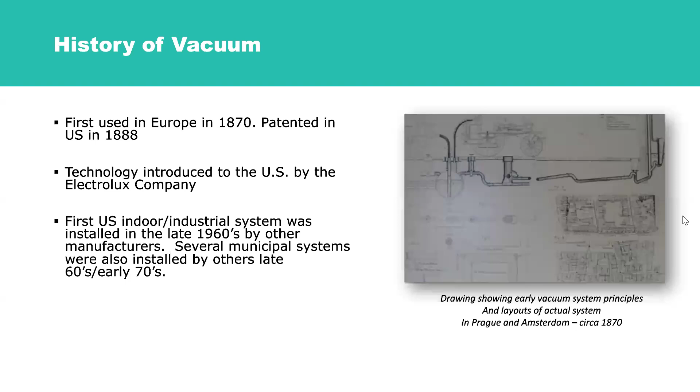As far as our systems globally, we have roughly 450 systems in North America, and another 631 plus in Europe, Australia, Africa. This is just the systems, and connection-wise we're talking hundreds of thousands of connections.

So we're looking at the three major components: we have the valve pit, the vacuum main, and the vacuum station. We'll look at these a little closer.

So the way the system works is the vacuum pumps create a vacuum on the collection tank, and you have the vacuum mains that run out to the pit itself. So that's where your vacuum source is coming from.

The gravity line from the dwelling goes into the pit. As the lower sump fills up, there's a sensor tube in there that's nothing but a chamber of air, and that chamber of air gets compressed. As the sump level rises, it compresses the chamber, compresses the air, and shifts a controller on top of the valve, which we'll look at a little bit later. When that valve shifts, it applies the vacuum from the front of the valve and allows the valve to open, thus letting the contents be evacuated.

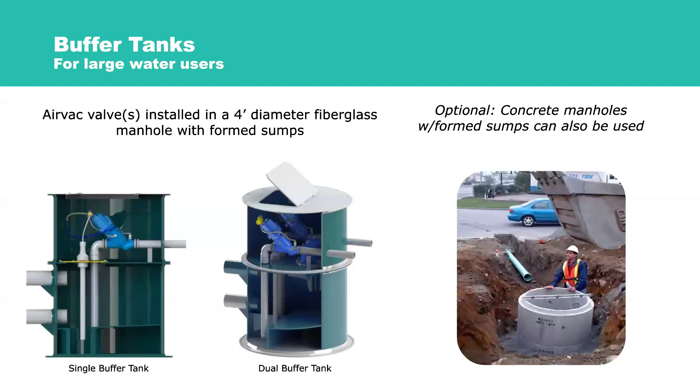As that pressure builds, it'll shift that valve, and it's simply a three-way valve, allowing the vacuum on the front of the valve to shift that valve and apply vacuum to the valve itself, which will pull that piston up.

It has a simple turn setting, a little lever setting that allows you to adjust how much air comes in behind. Once that sump is emptied, it empties roughly 10 gallons of fluid, which takes about 3 or 4 seconds. We'll follow that with anywhere between 5 and 10 or 11 seconds of atmospheric air, and that's what's pushing and propelling that sewage towards the vacuum station.

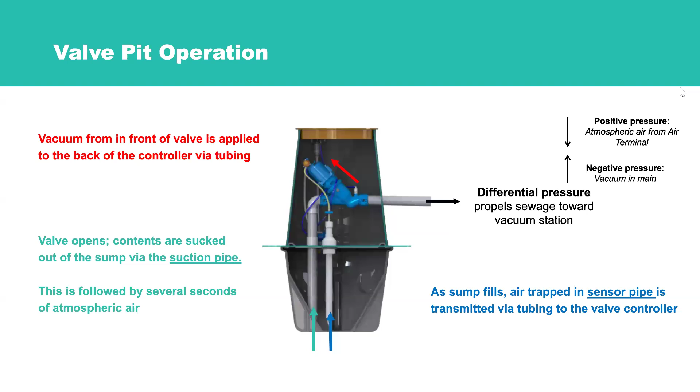So with the valve, it's very simple. You've got the controller up at the top, what I call the brains of the operation. You have the valve operator and the Y body, and this is all glass-filled polypropylene, which is chemical and corrosion resistant.

The operator in that controller can be removed with a simple slip key, like in the next slide, but the valve itself just screws in and screws out. It's a threaded Y body, so that Y body would stay in the pit. If you had to remove the valve for any reason, you would take off 3 lines and then simply screw the valve out and screw a new one back in.

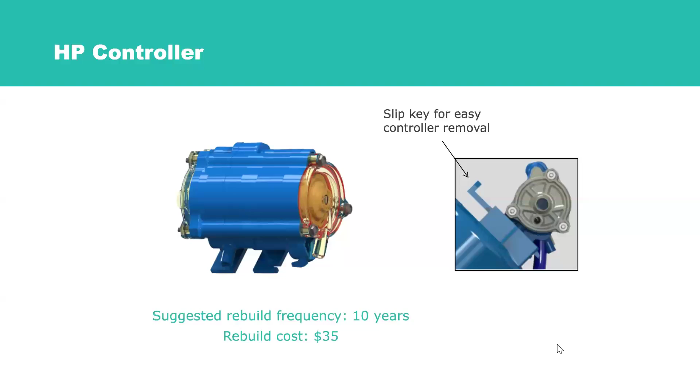Here's a closer look at the controller itself. We call it an HP controller, the newest generation of controllers. If you look to the right in that clear area, that's where the pressure diaphragm is. When that compressed air is coming up, it's pressing on that right-hand side and simply shifting it from that area. And again, there's just a slip key for easy removal.

When you're looking at how we put the pits in, how many houses can use a pit, generally speaking, one pit is servicing between 2 and 4 houses. The real controlling factor is how far the houses are from each other, because we have to accept the gravity line. If the gravity line is too deep, we would probably put another pit. But a lot of times houses are close enough where we can gather at least 2, if not 4, gravity lines coming in.

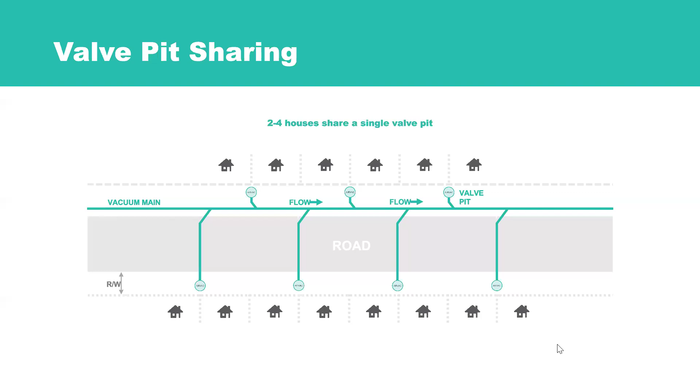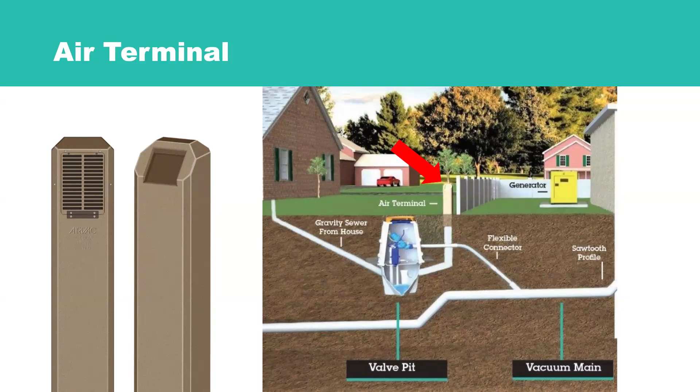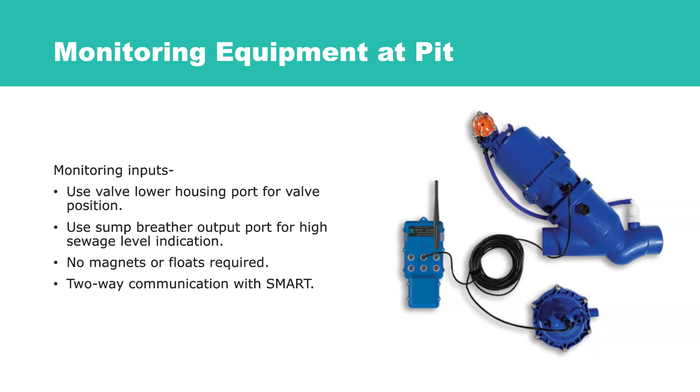So we can either measure and monitor your valve opening, closing, your time of open. We can also monitor your sump levels. And then we can use that information to give you a lot of different warnings or help with proactiveness and maintenance and operation of the system.

This is just a little more information on the monitoring. We are using LoRa, and it is real time. There's the opportunity for bidirectional communication with LoRa.

When we collect the data, we're able to look at it and do modulation with our vacuum pumps. We're able to open and close valves to reduce the chances of waterlogging, or to clear the lines if you know you have a large user coming on. So there's a lot of proactive measures with the monitoring, not just being reactive.

The monitoring is cloud-based. It helps with troubleshooting and helps make it much more of a proactive system. If you're running modulation of the pumps with SMART, we're able to be proactive in opening and closing valves placed strategically along through the field.

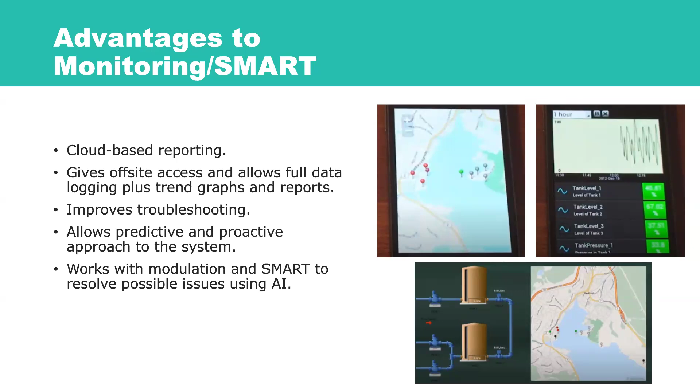A little bit more on smart. Simply, smart is when you have a vacuum system - what we're looking at is we want a nice vacuum from the collection tank all the way to the end of the line. The way that you lose vacuum is if you have what we call a waterlogged condition. So if you can imagine a plug of water being like a wall or a door, you're going to have vacuum up to that point, and you're not going to have much, if any, vacuum beyond that point.

The way we move the fluid is with the introduction of atmospheric air. So smart introduces that atmospheric air based on different conditions, whether it's a timed condition where we tell it when we want it to open at 7 a.m. to clear the line before school opens, or if it's looking at vacuum levels and it sees - say we have a set point of 10 inches of mercury, and once it hits that, we want this valve to cycle, just as a proactive measure so it doesn't waterlog. So there's a lot of different applications we can use smart with that help the system with its efficiencies.

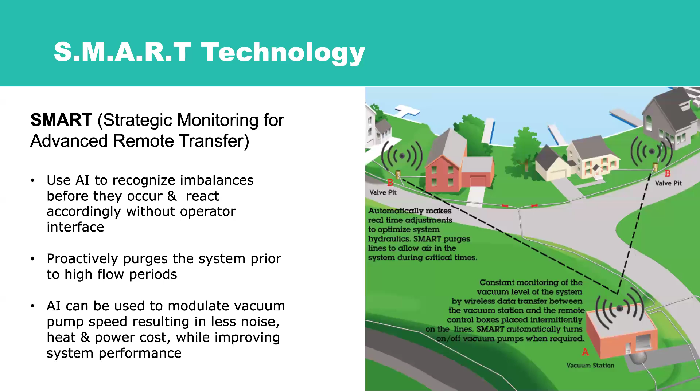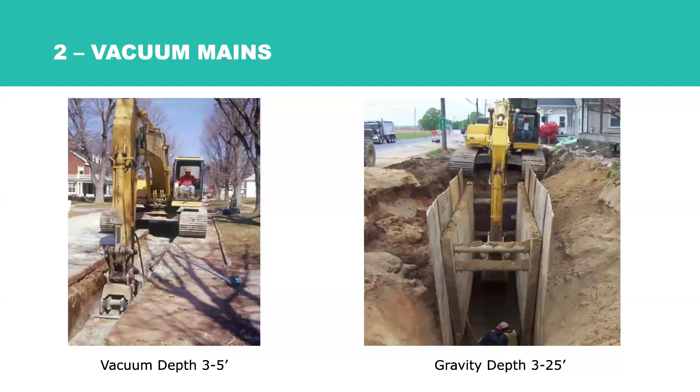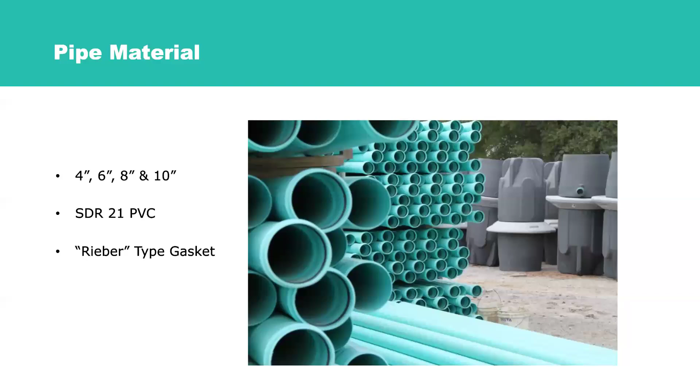Generally speaking, we use between 6 and 8 inch pipe typically, and 4 inch on the service laterals. We do recommend the SDR21 with the Rieber type gasket, which is simply a vacuum certified gasket. Here's a little closer look at the Rieber gasket - it's vacuum approved, a double lipped, locked-in gasket.

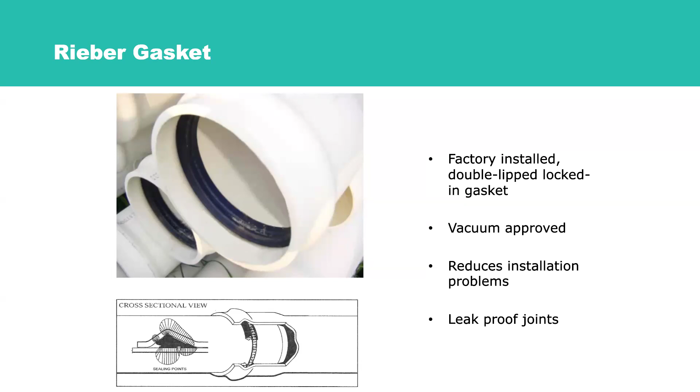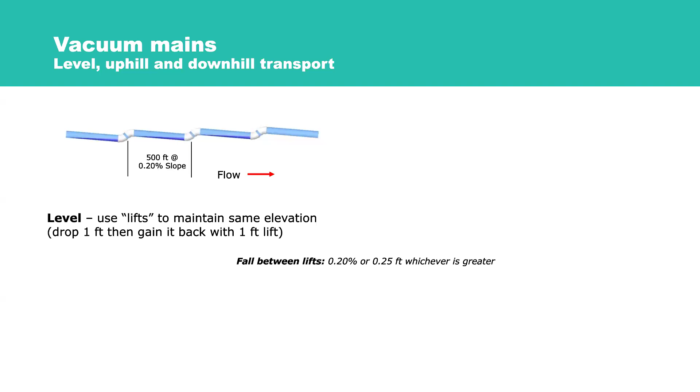A little bit more into the vacuum mains. When we're on level ground, we're just using that 0.2% slope, so after 500 feet we're going to drop a foot. We'll use that 1 foot lift to get back up to our starting elevation, and then just do that over and over. When we're going uphill, we'll use those same lifts, just spacing them closer together to gain that elevation. And of course downhill, we just follow the slope of the ground.

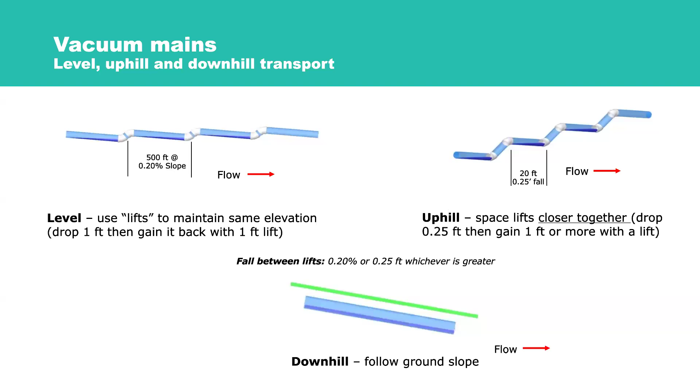Just a little more on the mains. We never use T's in vacuum - we always want a nice smooth 45. And then when you're doing the service laterals, that 45 is clocked at a 10 or 2 position on top.

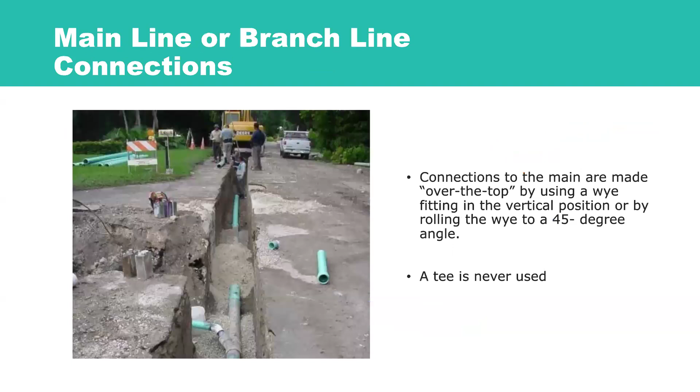For troubleshooting and maintenance purposes, we do use isolation valves, just resilient wedge gate valves. We'll have these at certain intervals along the main line, and then at all the branch lines as well. So if you need to service the system, you don't have to shut the whole system down - you can just isolate the area you need.

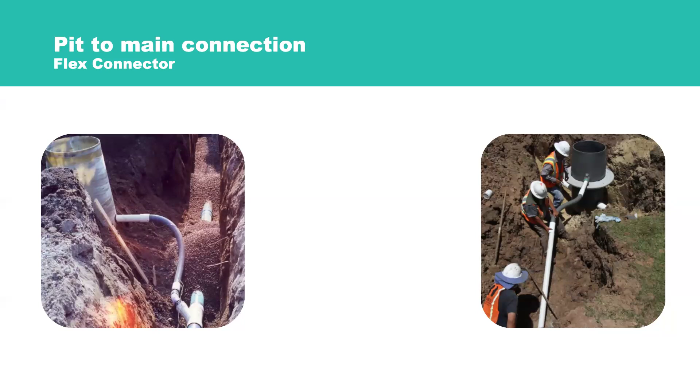Just one more quick thing about the pits. When you set a pit, it comes with a flexible connector, which gives it a little more flexibility with the setting of it, so you don't have to use a lot of couplings - a fixed point, another fixed point, and then the flexible connector in the center.

We mentioned what we really care about is the end of line vacuum. We can measure the tank, that's great, but if we're not getting vacuum out into the field, that's where we need it. So this is how we monitor that. It's simply communicating back with LoRa what the end of line is, and if we're running modulation or any of the next gen products, it all incorporates together.

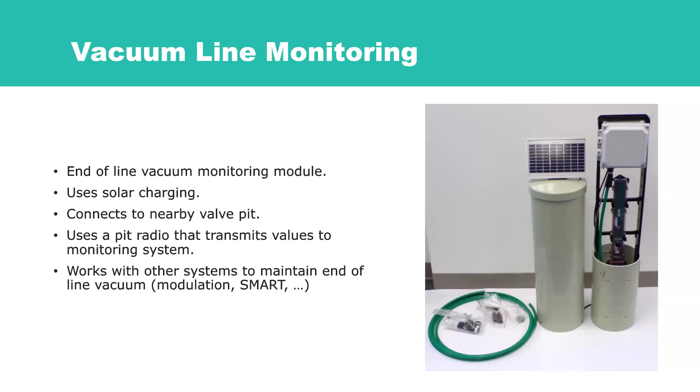The vacuum stations, generally speaking, are two stories. All your vacuum stations will have your sewage pumps and collection tank. If you look at the PacVac 2, the sewage pumps and collection tanks are in the basement, and the vacuum pumps and control panel are upstairs. The reason we generally put the collection tank on the lower side of the building is because we don't want to waste our lift. If we're 4 or 5 feet below ground, we don't want to lift all the way to grade and then have to go another 4 or 5 feet into the tank. There's only a certain amount of lift you can do over the course of a main run, so we want to limit how much lift we use to get it into the tank. That's why this is the more common configuration.

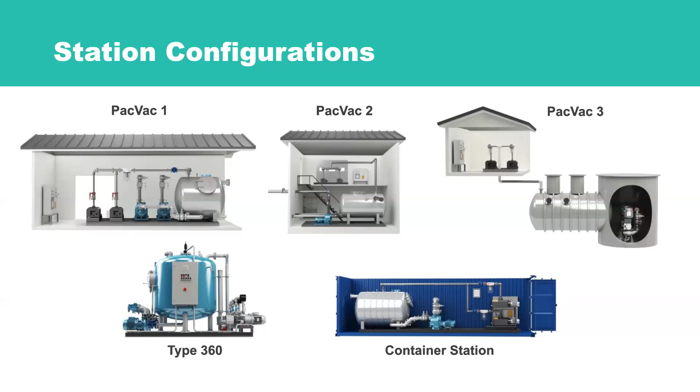Prefab buildings, we offer prefab buildings.

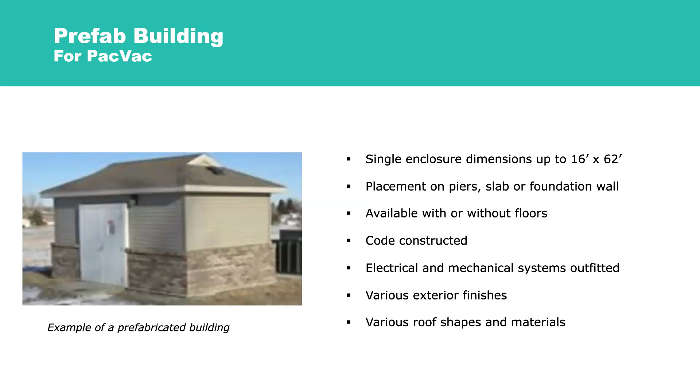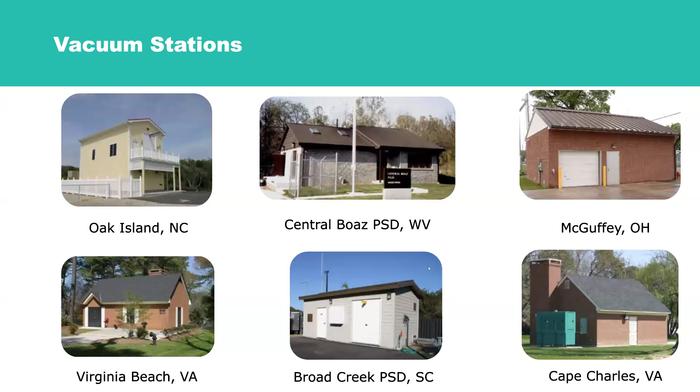Here's some examples of vacuum stations. They can be designed in any way desired. A lot of these, like the top left one, that's in Oak Island, North Carolina, and it looks just like the houses next to it. The Broad Creek one down in South Carolina is a prefab that was basically set in place. Everything, all the skids—what we refer to as the skid is the vacuum skid where the vacuum pumps are, the sewage pump skid, and collection tank—prior to any delivery, these are all tested at the factory to make sure everything is working correctly.

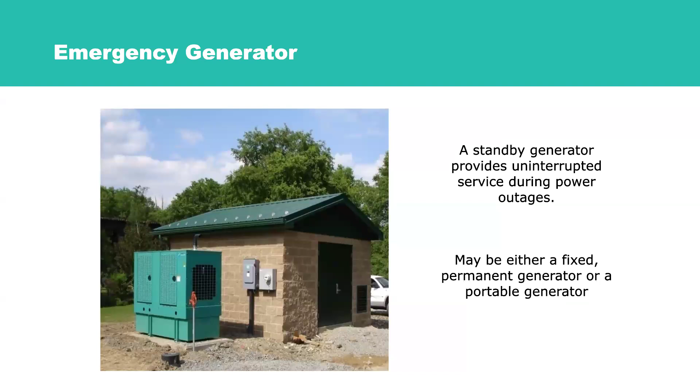If you recall, there's no power out in the field, so any power that's needed is all at this vacuum station. We do suggest standby generators, so in case there's a power interruption, the generator will kick on and your system will work without any issue.

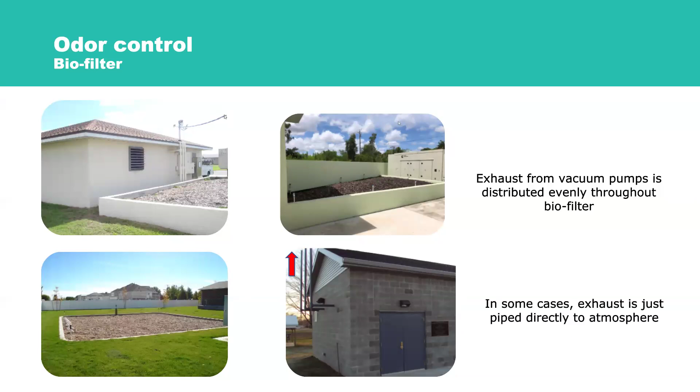Occasionally we'll need odor control if it's in an area that is populated greatly. The simplest way is to just use a filter media bed, which is simply wood chips. Carbon filters can be used too. Different types of odor control can be used, but the biofilter is probably the easiest and least expensive method, other than just piping it directly to atmosphere.

So again, when you're looking at vacuum versus gravity and other technologies, vacuum uses much more shallow and narrow trenches, so that's less excavation with more shallow digging.

Does the system require a mixer? No. With the grease—the question was just asked about grease—when it's being evacuated from the pit, it's moving at 15 to 18 feet per second, so it's a scouring rate and nothing really sticks to the walls. Anytime the wastewater gets to the collection tank, from the collection tank onward you may need to put something there if there are issues with a large collection of grease or things of that nature. But from the pit to the collection tank, we generally don't run anything regarding grease mixers or anything like that. I hope that answered that question.

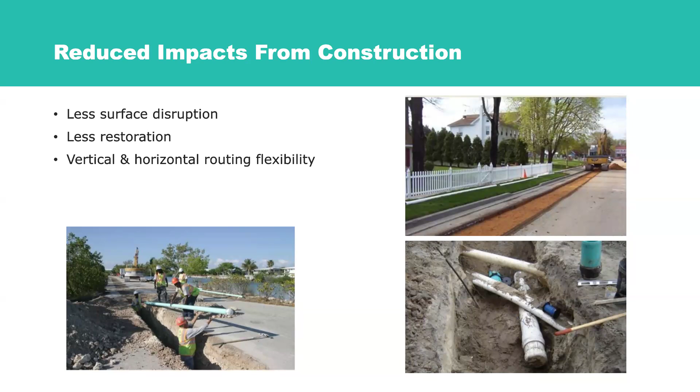With that, yeah—so less surface disruption, less restoration. If you do have existing utilities in the ground, we are very flexible horizontally and vertically by using those lifts, or just using 45s to navigate around and then another 45 to get back in line. Here's a couple of pictures showing some routing around current piping.

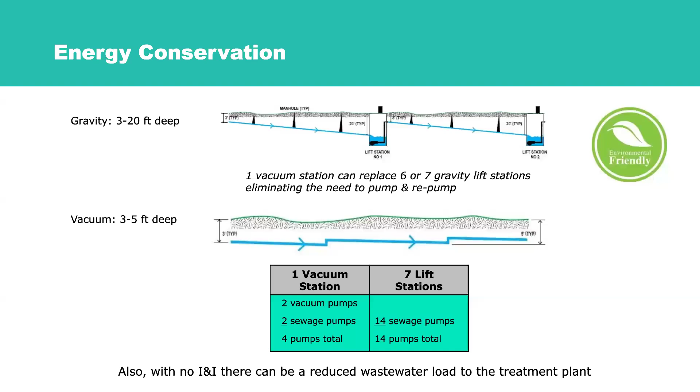With gravity, as we all know, it basically runs down, you pump it up, runs down, pump up. You need power at each of those lift stations and maintenance at each of those lift stations. In the ideal terrain, the flatter the better. For us, we can eliminate up to 7 lift stations with 1 vacuum station. Also, as a big note, we are a closed system—not a confined space, but closed—so once the water gets into our system, we have little to no inflow and infiltration. So you don't have to treat water unnecessarily. It is operator friendly, as we saw in the picture earlier. There's no contamination—you have that lower sump there that contains the wastewater away from the upper chamber.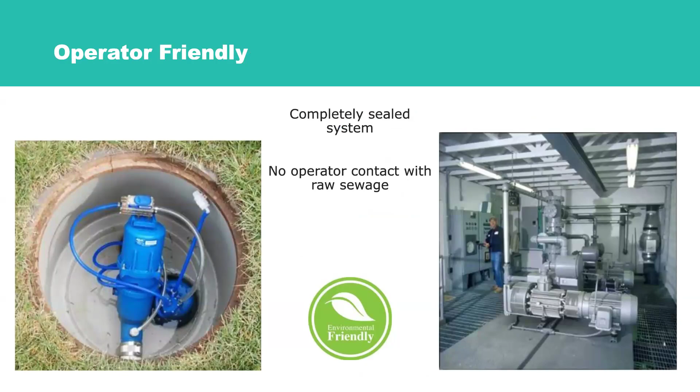And most importantly, where does it apply? New or existing developments, communities. We do a lot of septic to sewer, where we're having leaching of septic tanks, sandy conditions, unstable soils. Basically, we say that the harder it is, the better chance vacuum is a good solution.

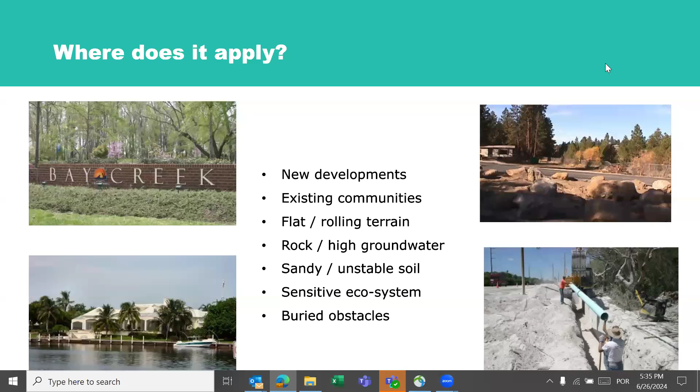Okay, I'd missed that question, but yeah, if you want to go one more, I think that goes into some of our applications.

So this is in Jurerê, Brazil. On the right there is a vacuum station. The left shows the candy cane, which is basically the same as the air terminal. That's your air inlet. And then underneath that bush right there, you see the valve pit. That's a sidewalk in front of an extremely beautiful home too.

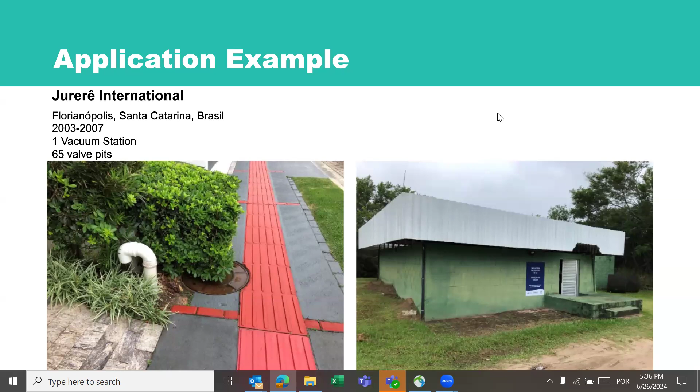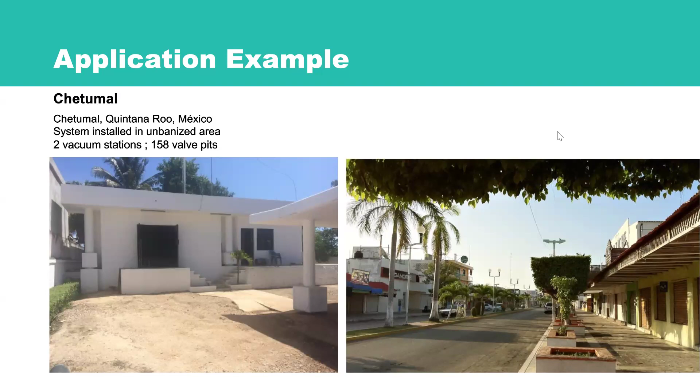Chetumal. This is more of an urbanized, store area than residential, but it is 2 vacuum stations, roughly 160 pits.

Then still in Quintana Roo, we have this system, which again is in more of a commercial area. As you can see to the right, that's the depth of the trench, so no dewatering needed. Roughly, I think that's around 90 valve pits.

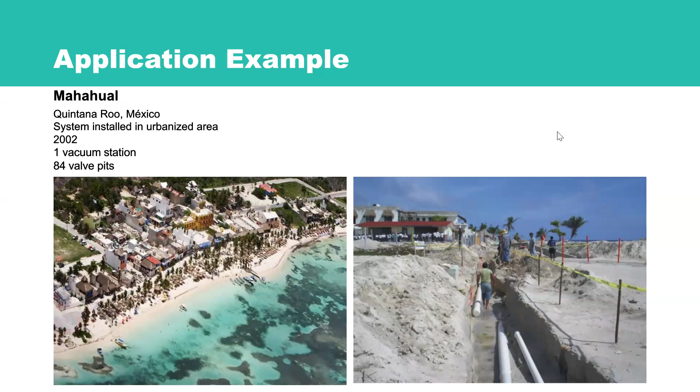In Tortel, Chile, this one is fair. When was this one put in, Anna? This was like just a couple of years ago, a year ago? Yeah, this was made during the COVID time.

This is a community far away from everything, so the only way to collect sewage there was a special project. The pipes are under the path that they have there. The reason why they use HDPE, the black pipes, is that it's more resistant to the weather they have, from the warm, very hot, to the very cold, in the Patagonia area. So they will extend this soon.

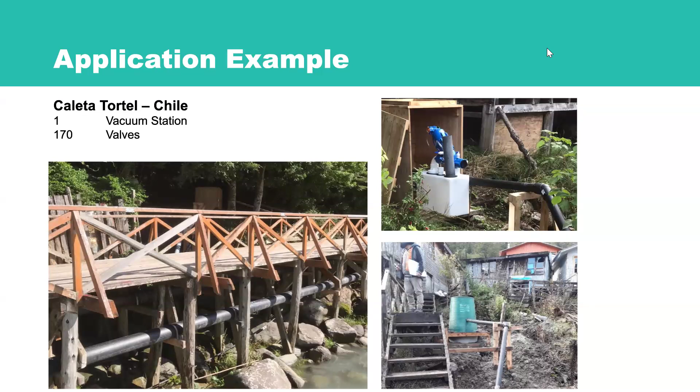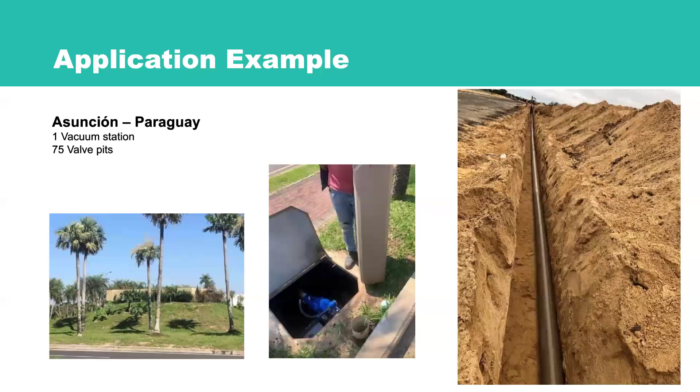And this is in Paraguay. This is the first vacuum station that they installed there. This is a new development area, and they collect from commercial buildings, two commercial buildings, restaurants, and an island with a marina, with homes and lots, and they are going to extend soon as well.

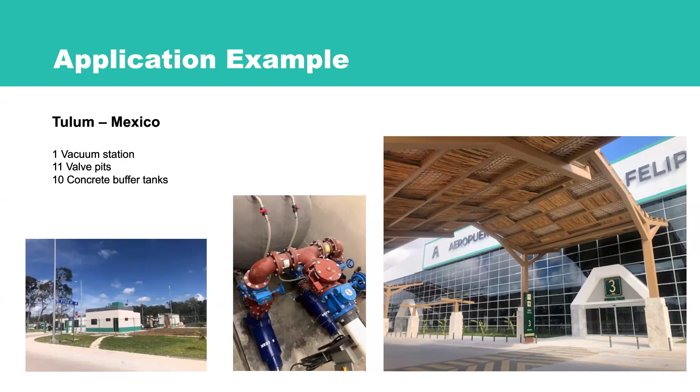Yeah. We are in, can you continue? No, yeah, you can go ahead. Okay, so I'm sorry about my English. I'm a Portuguese speaker, but if you cannot understand, just ask.

We are helping in different countries to include the standards for collecting sewage with vacuum systems as an alternative, because we understand that we can help engineering to make better work in flat areas, in areas where you have difficulties to excavate, and that's why we call ourselves an alternative solution.

We are very close to our customers always, because we start with the specification, with the project, helping to make the project as well, until the operators. So we provide continuing trainings for the operators, and we have the portal which makes us close to our customers. So we have trainings, videos in different languages, and we have all the projects that can help you understand how to build your own project. So it's a way that we have to be close. So we are open to questions.

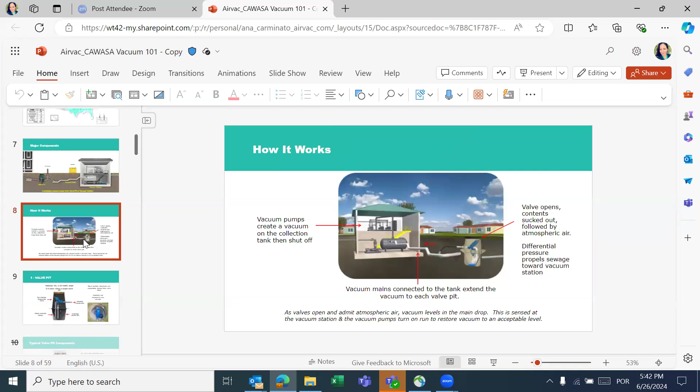And the second question is, with the absence of manholes, how do you deal with chokes, blockages? So with that, we do have the manhole cover, where you can pull out and access the lower sump. There's three penetrations in that deck between the upper and lower sump, so you can access the lower sump from the upper. We just have it in grommets so that we can reduce I&I as much as possible. And once it gets into the system, it's moving at 15 to 18 feet per second, which is considered a scouring velocity. So we've never had issues with anything getting clogged in the mains, because the mains are the bigger pipes. So if it can get into the pit, it can get through the system to the collection tank.

The gravity line from the homes arrives at the lower part of the sump, and everything was sucked from a pipe here, and the valve has 3 inches, which is kind of the same or a little bit bigger than the toilet. So everything will be collected, and the velocity is around 5 meters per second. It's very high, so everything will arrive at the tank kind of liquid.

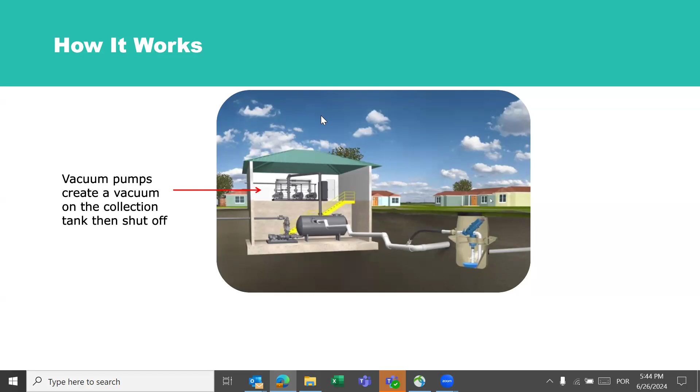Where is the actuation valve for the vacuum that creates the vacuum for the first collection pit coming from the houses and from the source? The gentleman said there are sensors to indicate certain parameters. Is there one for leaks, or how is it detected? I know you said you have a compartmentalized pit, so is it... if there's a leak in the system...

If there's a leak in the system, you'll notice the pump run times will go up. If a valve hangs open and you have monitoring, you'll get a notification that the valve's open if it's open past a certain time, in seconds. There's also a more economical way to determine whether a valve is stuck open, simply with a solar light which mounts to the air terminal. That's the second method. If there's an issue with a vacuum main or service lateral, you'll start to see your pump run times creep up on your vacuum pumps. You can shut off the isolation valve to two mains and see which one holds vacuum and which doesn't, and that tells you which line your issue is with. But once the vacuum mains get put in, unless someone's installing utilities and runs a drill through it, you generally never have issues with the vacuum mains. That's why we use 45s, not 90s, for fittings.

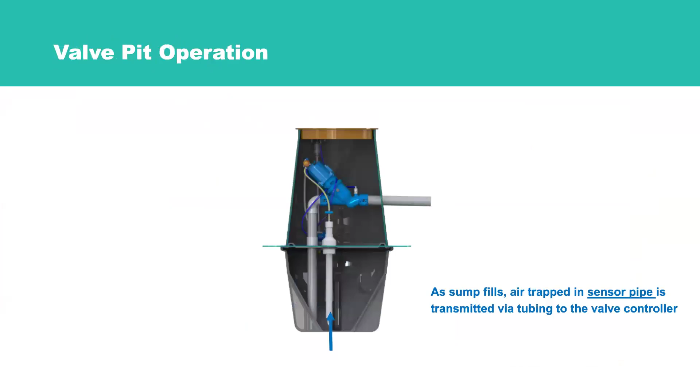The second question is for the valve itself, the Y body. You said it's chemically coated? It's chemical resistance to corrosion, etc. Do you take into consideration the hydrogen sulfide environment it's in? From experience, these things are coated, and I don't know if there's a different material now versus 10 or 20 years ago, because the parts don't last, they're not as durable as they were. So would it stand up to that test of time? Also, what is the turnaround time on these parts and the system? How long does it last generally?

Great question. It's actually the material it's made out of, so there's no coating on it, it's the actual material. We have some of these valves from 1970 still being used today in that system. So it's nothing to get 20, 30 years out of these valves. Rebuild time is around 15 years, and with the rebuild it's simply some rubber components inside. The longevity of them is very high. We don't have any issue with H2S gases because the valve itself is not sitting in the H2S gases, it's being sucked out at 10 gallons, so very seldom do you have fluid in there long enough to get septic. The valves, we don't have issue with the material at all. It's not a coated material, it is the material itself.

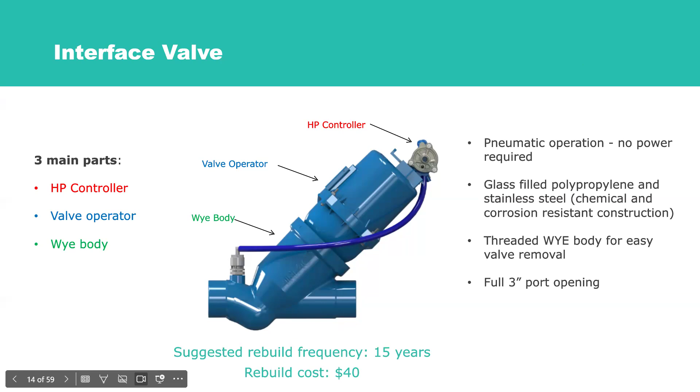The floor is open. Because the system, you've shown how you do the collection, but at the end of the system, do you have a treatment system for the effluents that you've collected? We handle the collection side. Once it leaves our four walls, we can either pump it to a lagoon, to a wet well, or to a treatment facility that's already there, force main it. But we do not handle outside those four walls when it comes to after the collection side.

So it's strictly a collection system, but you don't deal with the treatment system? Right, it would be a collection system, not treatment. So, for example, if a utility were to go in that direction, would it mean they'd have to establish a treatment system at the end of the line, or would it be a larger collection system where they could truck it out to a main treatment facility? Is that what you were suggesting? Yeah, but it's not uncommon to pump, we have some clients that will pump into a wet well and then force main it miles away.

We can size our sewage pumps accordingly, depending on the terrain, to pipe it to wherever it needs to go. Others use lagoons. It really just depends on the municipality, the town, or the application itself. As far as the actual treatment, we're flexible, but all we can do is pump it to where it needs to be.

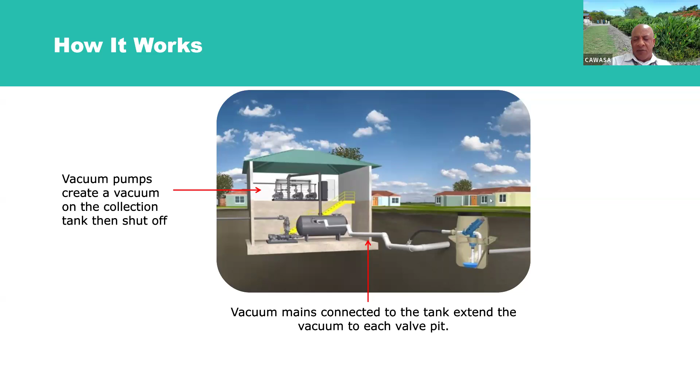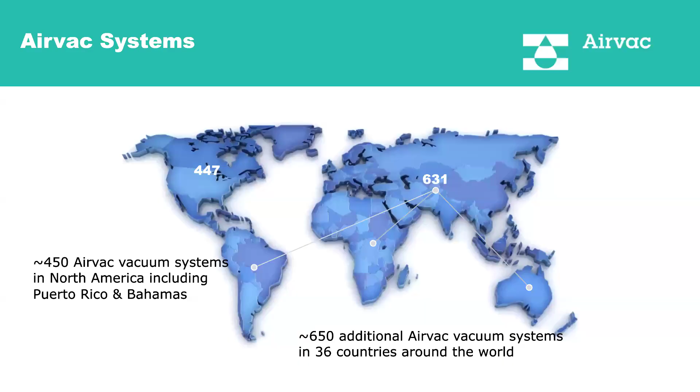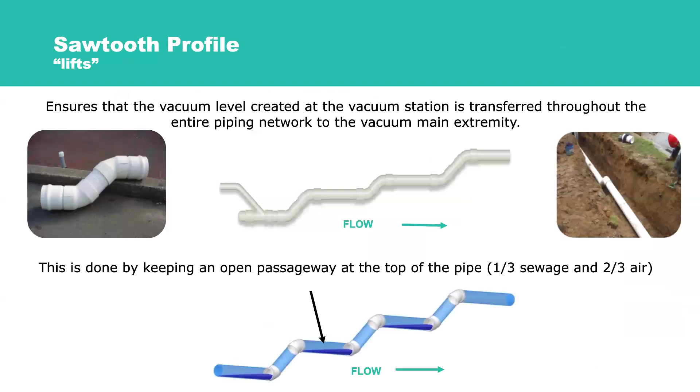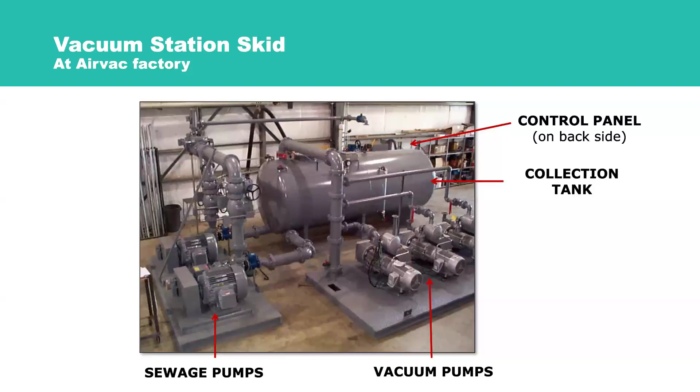What are some of the advantages of such a system? In the opening slides, there was suitability for areas with water scarcity and terrain issues. The terrain issue is a big one. Since we're only going 3 to 5 feet, dewatering isn't as great of an issue as with gravity. Also, for existing communities doing septic-to-sewer conversions, we use much smaller equipment with a tiny trench compared to gravity. We also use piping 1 to 2 sizes smaller than gravity, and since it's a scouring velocity, we don't require any flushing or jetting of the network.

We have a question in the chat: for a treatment plant already designed for a particular flow, how does this system affect daily flow compared to a gravity system? From an existing treatment plant, we have to consider the vacuum station according to that flow, and we collect it that way. Depending on the area, we can specify the vacuum station, the only place that needs power energy, and send it from there to the treatment plant. Sometimes the vacuum station can be very close to the treatment plant, but it depends on the topography and flow we have to collect. So each project is a special solution. We can analyze any project you have and make a layout and an estimate for free, without charges, so you can understand the area better. With the flow, our flow is whatever our flow is—we have very little inflow and infiltration, so you actually get more accurate flow than with gravity, because during a storm gravity systems treat a lot of water that doesn't need to be treated. So it would affect daily flow by being less than gravity flow, because of the non-introduction of the inflow and infiltration.